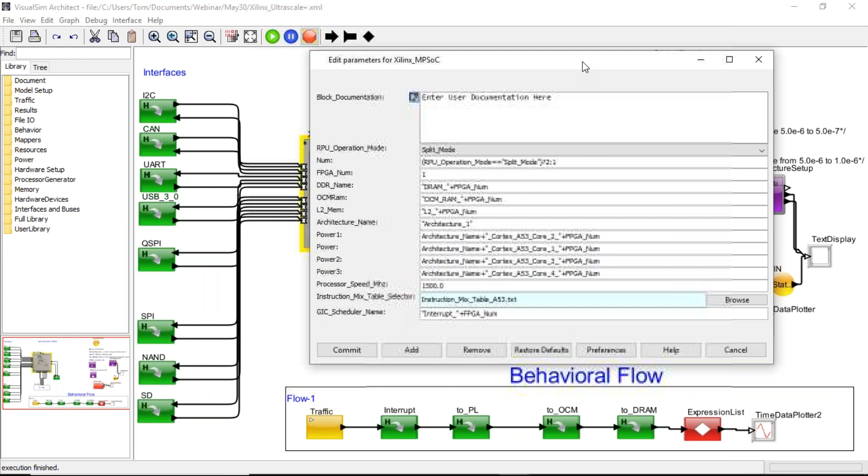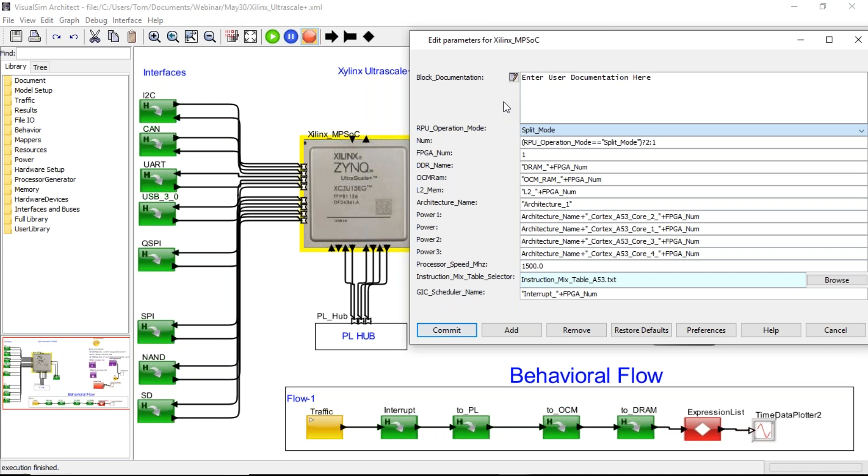For easy understanding, let me double click here so you can see the parameters which have been designed. As you can see, we have a real-time processing unit, and the RPU has two types of operation, the split mode and the lockstep mode. The split mode is the default mode, and can also be called performance mode. What happens here is each core operates independently.

If we go inside the MPSoC we have designed over here, we can see the detailed implementation of this Xilinx model. We have an application processing unit over here, the real-time processing unit over here, then the CCI unit, and then the Snoop control unit. We designed all of this to match the specifications given in the data sheet and linked them with each other so that at the end we get a perfect running model.

Now at the bottom we have a behavior flow which states what data has to be sent to the PL and what has to be sent to the processor cores. Accordingly, we are going to get a result. We are generating the statistics. For example, we are generating the power here and the latency over here. So I am going to run it and show you the results.

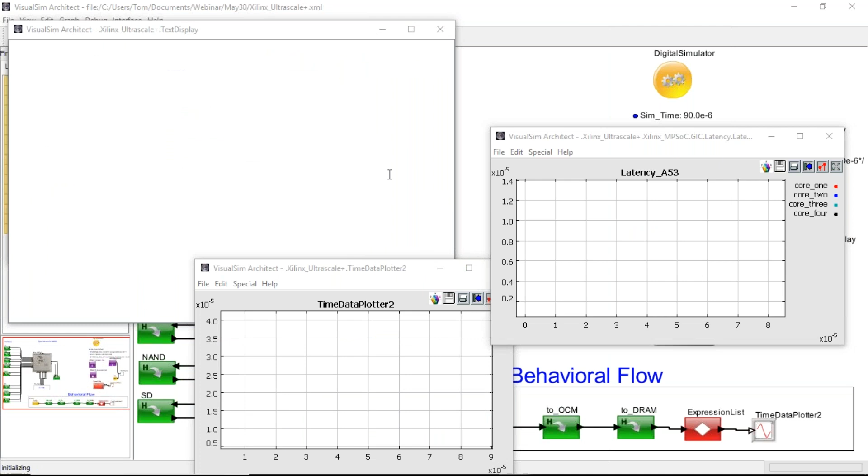So this window over here is plotting the power. As you can see, it is plotting the average and instantaneous power. And this one over here is the behavioral flow latency, which means the latency for the whole process to complete. That means the traffic is generated, then it interrupts the APU units, then it goes to the PL, then to the on-chip memory, and then to the DRAM unit.

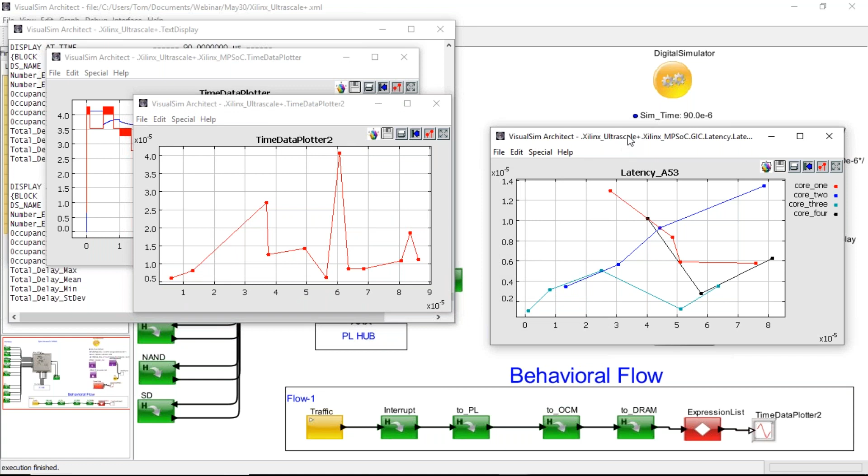For this whole process to complete, the latency has been calculated, and this is the plot which has been obtained. And this over here is the latency for the A53 cores which have been designed in the application processing unit, which is inside this APU, which is inside this unit.

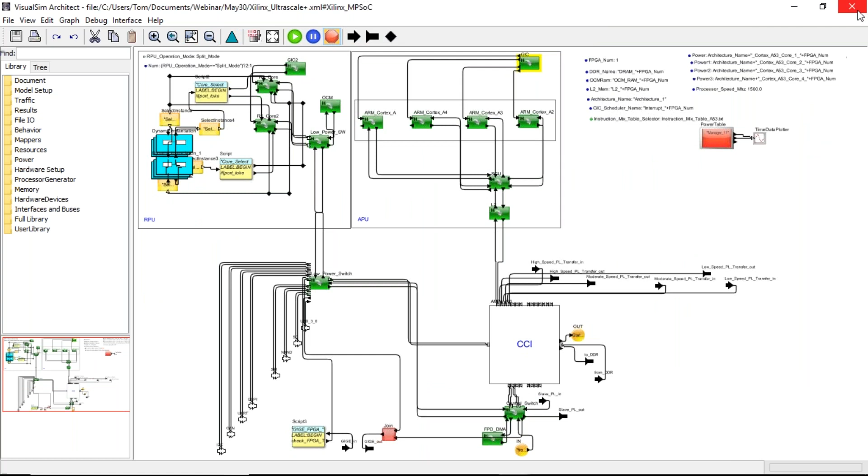So as you can see here, each time an interrupt is being generated, triggered, it is going to come to the GIC and it is going to trigger a specific core as per the application, and then it is going to look up to the cache unit, and then if it is a cache miss on L2, it is going to go through the CCI and to the external memory, which is the DDR.

So we are going to go back to the presentation. Yeah.

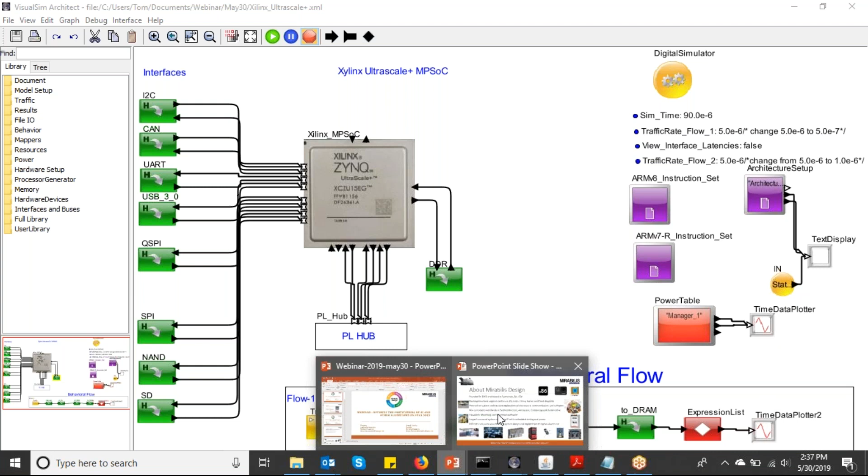So once we have the FPGA model designed, what we have to come up with is the metrics that we have to evaluate. So in the case which I have shown you before, it had a few of the design cases, for which we were focused on the latency and the power. So in this case, what we were focused on was latency and power. Similarly, if the customer wants to focus on throughput, then we have to come up with the cases where the throughput will be generated.

So now the next consideration of this webinar is to optimize the applications which are run on FPGAs. Optimization in the sense the user might want a case where the latency has been optimized or the power has been optimized, or a case where it can run thousands of test cases in parallel and still come up with a quite reasonable response time. And all those are the cases that we are going to be dealing with.

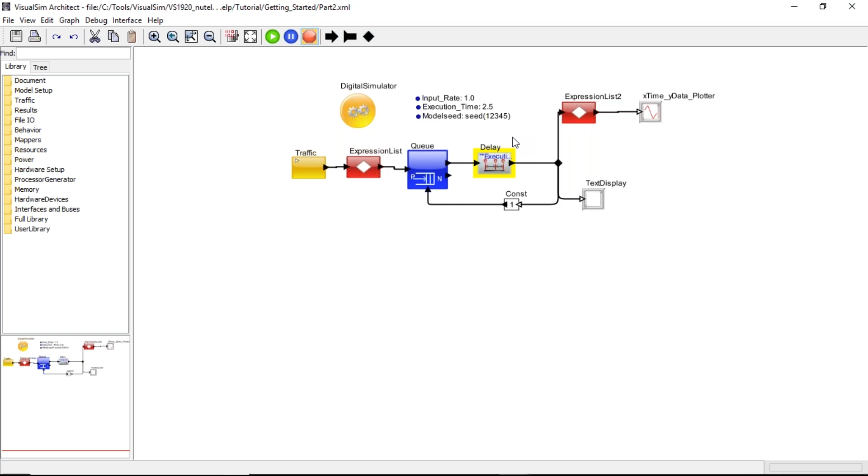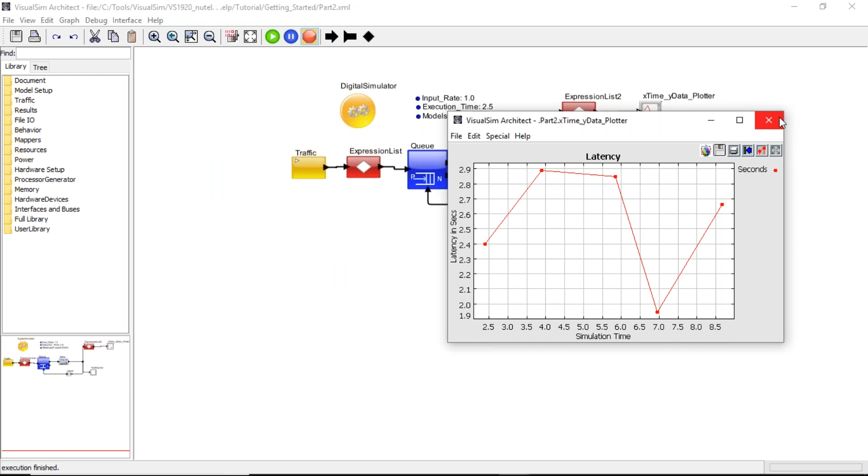There are different stages of modeling. At first, we'll design a stochastic model, which will have delay blocks. Then at a later stage, we'll replace those delay blocks with cycle-accurate models. Right now, this is a pretty generic, simple model. If you run this model, you can see the results generated. We have a latency plot and a statistics plot as well. Now let's say you want to run this model over tens or thousands of cases and compare the results on a single screen. That can be done with the help of the application known as the post processor.

So over here we run the same model for three different cases. For the first case, the execution time was 2.5 and the input rate was 1.0. For the second case, the execution time was 2.0 and the input rate was 0.8. And for the third case, it was 2.5 and the input rate was 0.5.

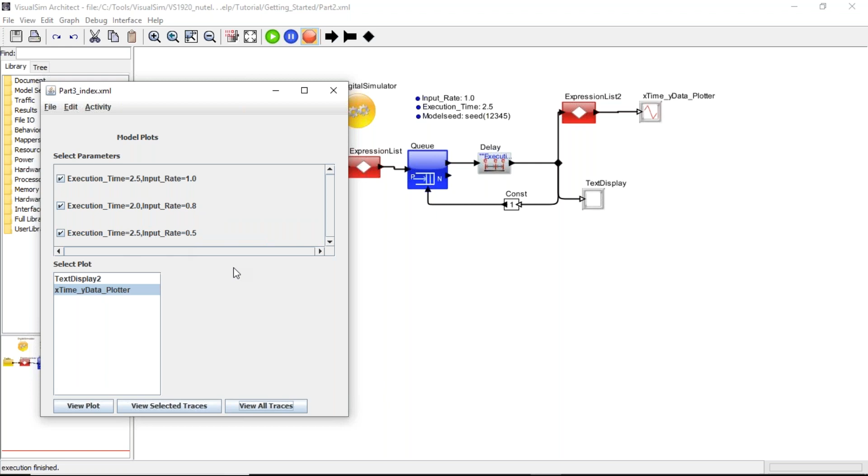So if I click on view all traces, you can see here the latency obtained for the three cases has been overlapped onto each other and can be viewed on a single screen. So this is one of the advantages of using Visual Sim, where you are getting a lot of applications on a single platform.

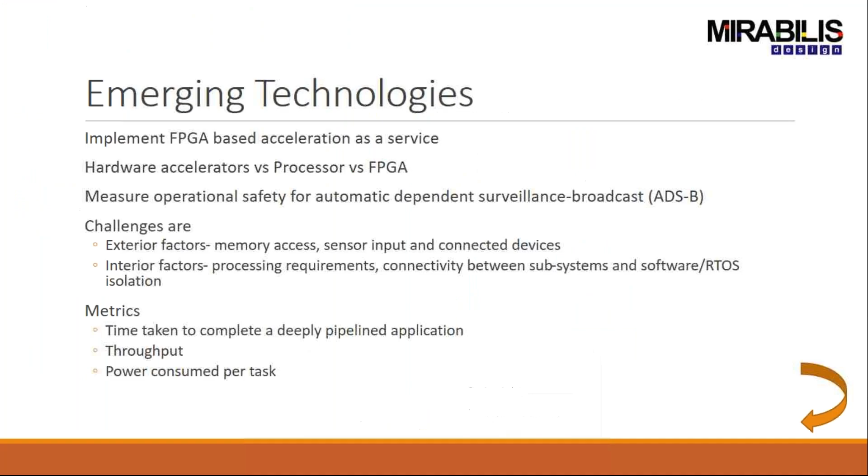So what importance does it have? Let's say we have an application where the buffer size is of utmost importance because the buffer size can be costly. So keeping the buffer size to a minimum is what the user might prefer. That is one of the concerns. And then the utilization. If you have a resource like a memory, and the utilization is quite low, then we don't need that much memory, so the memory section can be cut down quite well.

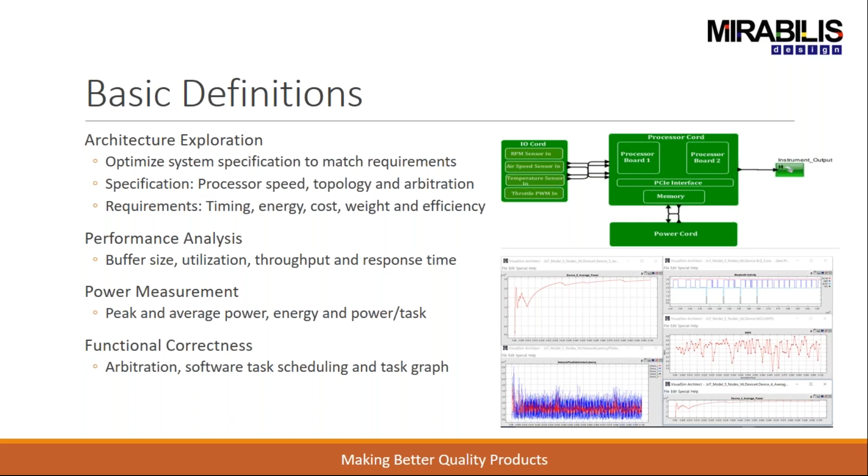And the functional correctness. In functional correctness, we will be checking the arbitration, software task scheduling, and the task graph. About Visual Sim: we are using Visual Sim for system architecture exploration. System architecture exploration can be done on three domains: hardware, software, and network. Over these three domains, we can do the analysis on four different sections: performance analysis, power exploration, failure analysis, and functional analysis.

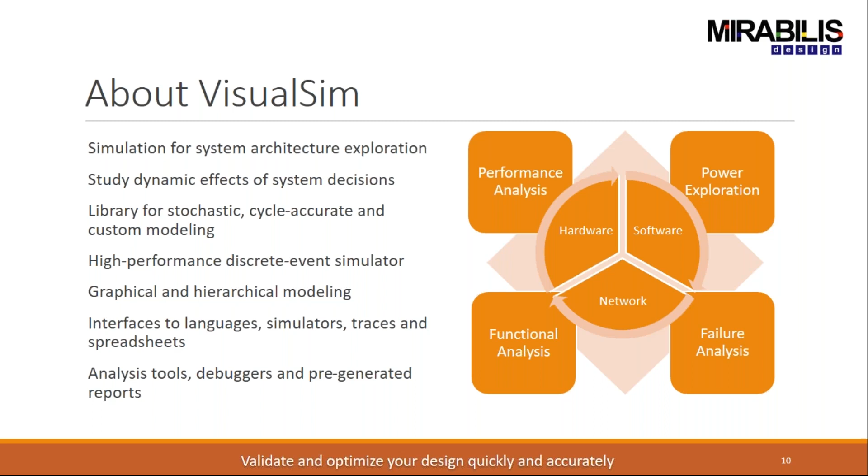In performance analysis, we will be dealing with the buffer occupancy, the latency, the throughput. In power exploration, we'll be dealing with the maximum power utilized, the average power used, and things like that. In failure analysis, we'll be dealing with what is going to happen to the model if some of the links fail, or if some of the cores are not performing as they are supposed to. And then we are going to do the functional analysis as well.

So the benefit of this library block is that when the user, let's say the user is having an application or a model which is using AUTOSAR or an ARM A53 processor. So all of those have been implemented and integrated into the library. So all the user has to do is go to the model. I mean, I can just show you.

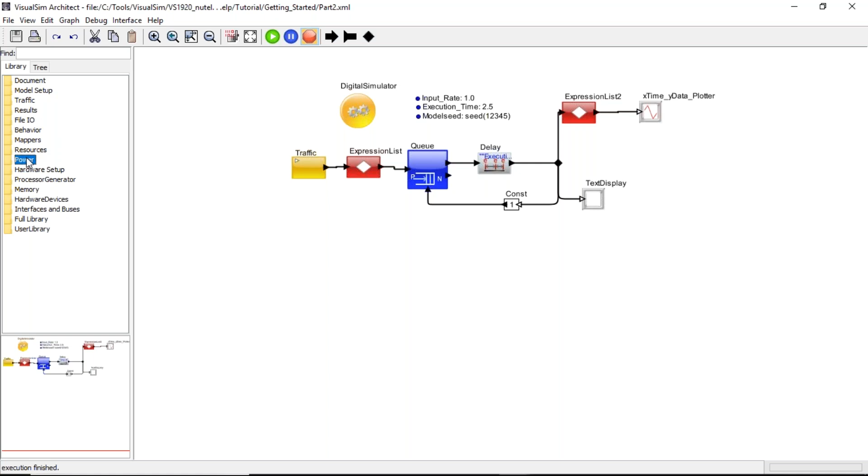You can see here on the left hand side, these are the library blocks. If you want to calculate the power, you can just go over here and drag and drop a power unit and then configure the fields over here such that it is going to match the requirement and the fields which have been designed.

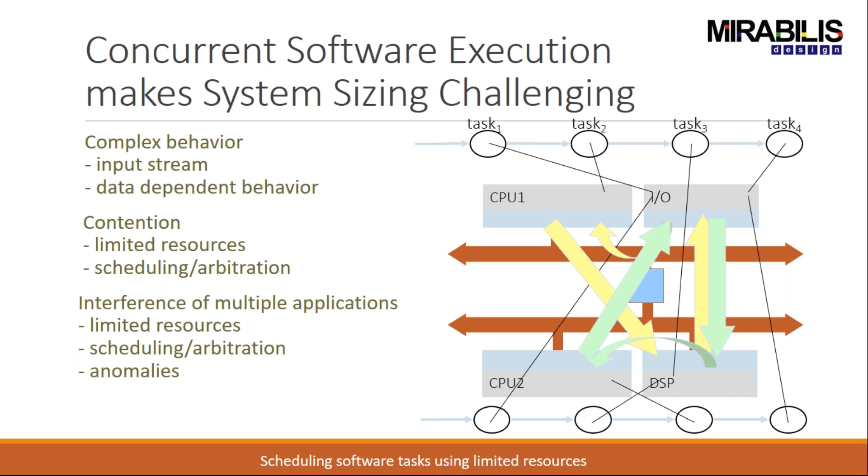So now there is no contention of resources. The data is going to go from the I/O through CPU one. From CPU one, it is going to go through the DSP, and then it is going to come back to the I/O. So now let's throw in another application. Now there is a contention. So this contention, limited resources, scheduling and arbitration have to be taken care of in case we are designing an accurate model.

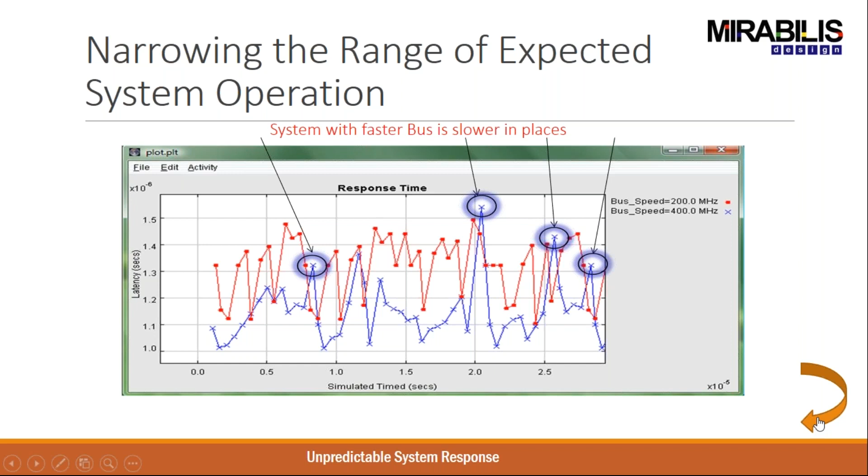So another design challenge is the impact of software architecture. Let's take an example of an automotive system. Let's consider the brake system. As you know, the brake unit is extremely time sensitive. What that means is, let's say a car is moving at 60 miles per hour. It is going to have about 3.5 milliseconds before the car has to come to a stop.

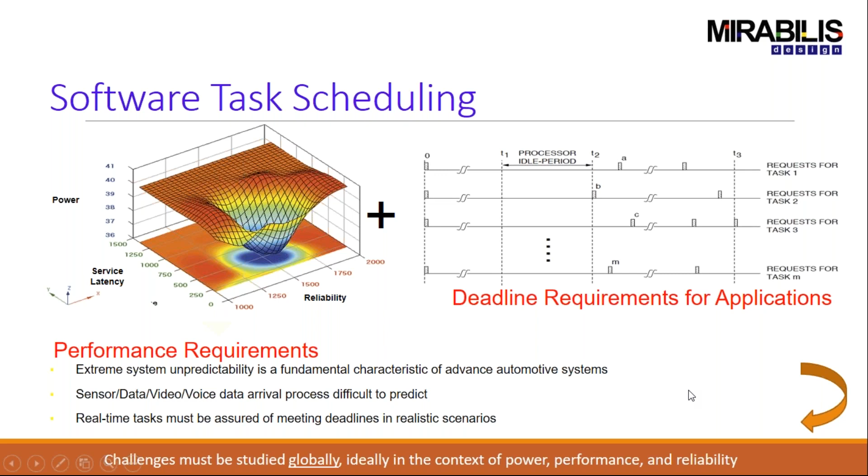So if you are designing an automotive system, it is extremely important that certain tasks are completed within a deadline. Such is the case with braking applications. So all those features have to be considered while designing a model.

So now designing FPGA models using VisualSim is going to have two parts. The first is deciding the best partitioning of an application onto the FPGA core and fabric, where the FPGA core houses the APU and RPU units, and the second is the fabric unit. The second part will be the internal operations of the FPGA, where we deal with how we can design an application processing unit, a real-time processing unit, snoop control unit, cache coherent interconnect, and general purpose DMAs.

And the considerations which have to be taken care of while designing these two parts: obtaining accurate timing details. So what does that mean? Obtaining accurate timing details in the sense we have to execute the pipeline applications in a timely basis.

So if you are implementing a DNN or ML application, then it is of utmost importance that the pipeline, the nonlinear applications, the ReLU or the matrix multiplication, has to be done in a sequential manner. Then the latency calculations and the scheduling and the partitioning of the applications also have to be given utmost importance.

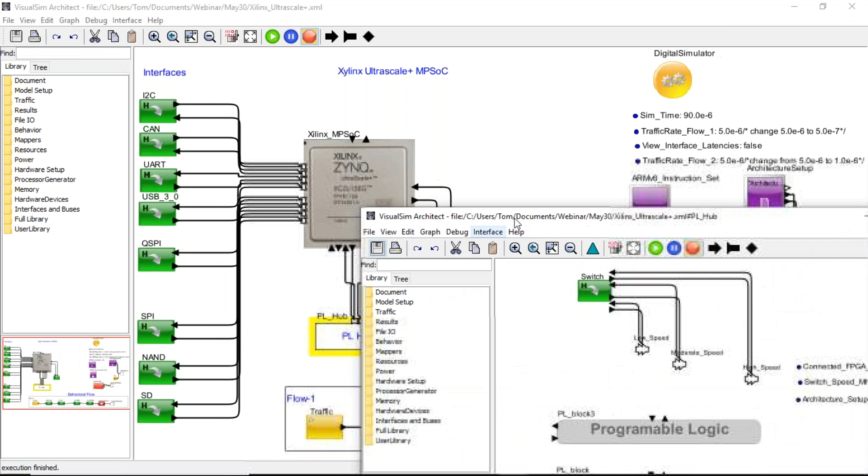So what we have over here is a bunch of interfaces like I2C, CAN, UART, USB 3.0, Ethernet, all of that. And then we are feeding that into the MPSoC. And here we have the PL hub, where if I go in, you can see the programmable logic section. Two of them I have provided, and if I double click on that, I can see the parameters which can be changed as per the user's wishes.

So this whole model shows the importance of using a virtual prototype. As a user, you can just build up this virtual prototype within a couple of weeks, and then you can run the model on different test cases. As you can see, if I put this parameter to write, then that section is going to run in sequence with the write sequence.

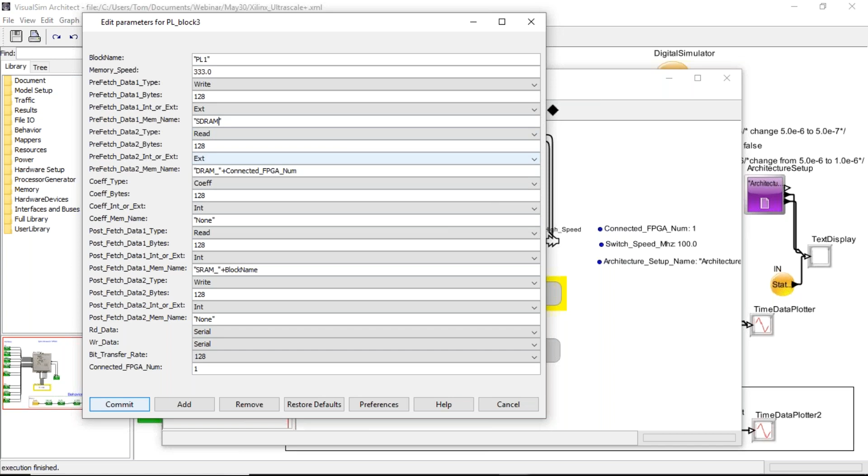So if I am putting it as external, that means we have to prefetch the data from an external source, which can be given as SDRAM. So what happens now is it is going to do a write sequence to an external memory SDRAM. So it is that easy when we are doing system level modeling. That is one of the key benefits of using system level modeling. So back to the presentation.

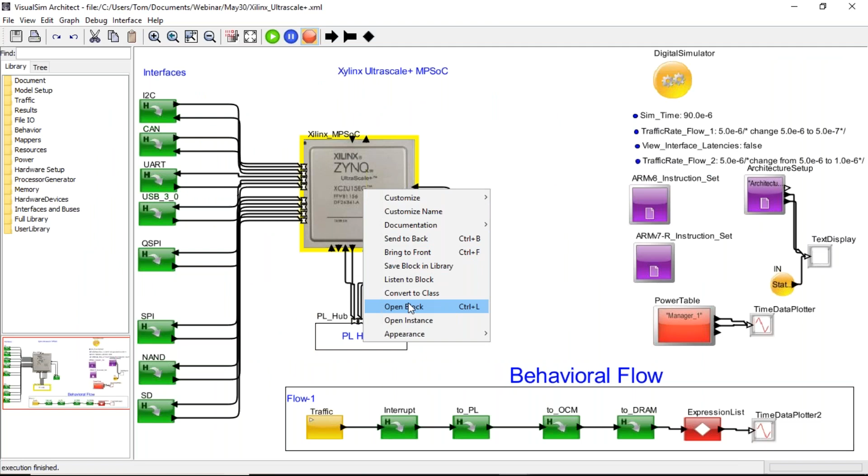So now we need to design the FPGA core and a fabric. We begin by designing a stochastic model as per the design flow, using delay blocks instead of the actual ARM processors in the FPGA cores. This is an extremely accurate model. What I mean by accurate is, if I go inside, we can see the processor blocks, which have the pipeline stages, the 7 stage pipeline, and the I1 D1 cache units, the sizes, the miss memory, and this has been designed to pretty accurate stages.

But when we are starting to build up a virtual prototype, what really matters is to bring up an easy or stochastic model which has just the delay blocks. Once we have the delay block stochastic model, we obtain the statistics using it, for example, the latency, throughput, utilization stats, and the power usage. Once we have the stochastic model up and running, we are going to replace those delay blocks with the ARM processors and the cycle-accurate memory blocks, GPDMAs, and so on.

And once we implement the cycle accurate model, we are gonna calculate the desired metric values using this cycle accurate model. And once we have both the cycle accurate and the stochastic model, we are gonna vary the different parameters, partitioning, sizing, and see how those results change.

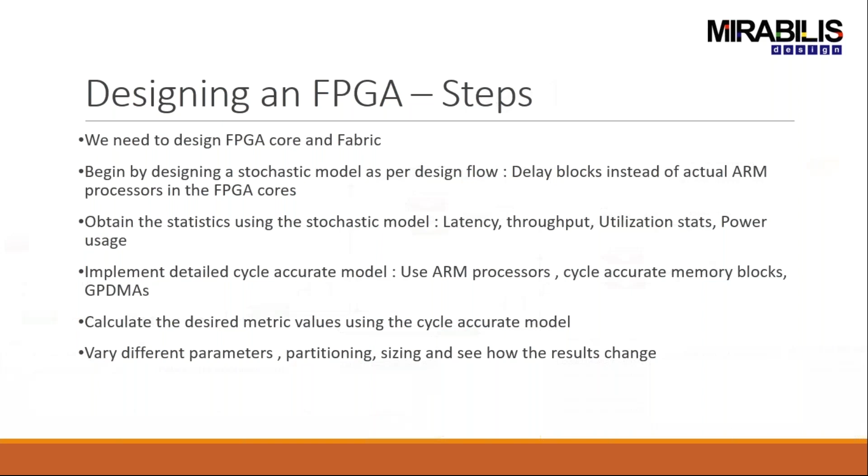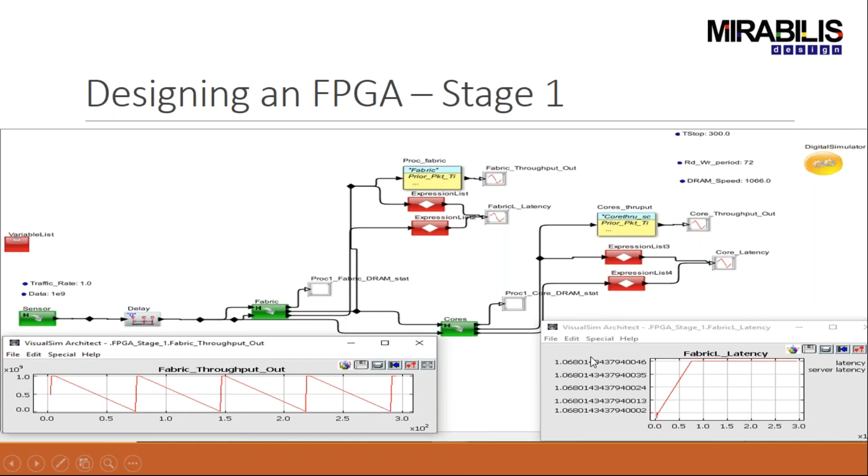So over here, we are having one of the earlier stages that we built in the building of an FPGA application. So over here we are having a sensor which is gonna go through a delay block and then go to the fabric and then to the cores. And we are calculating the latency and the throughput for this early stage stochastic model. So I am going to take you to that model right away.

Yeah. So we are having this model over here. So if I am gonna go to the sensor block over here, sensor is nothing but a traffic generator. So it is going to generate a traffic at a rate of traffic rate, and it will be fixed. So that means we are going to generate a traffic at each 1 second, and it will be coming out through this port and then going to the fabric and the FPGA cores.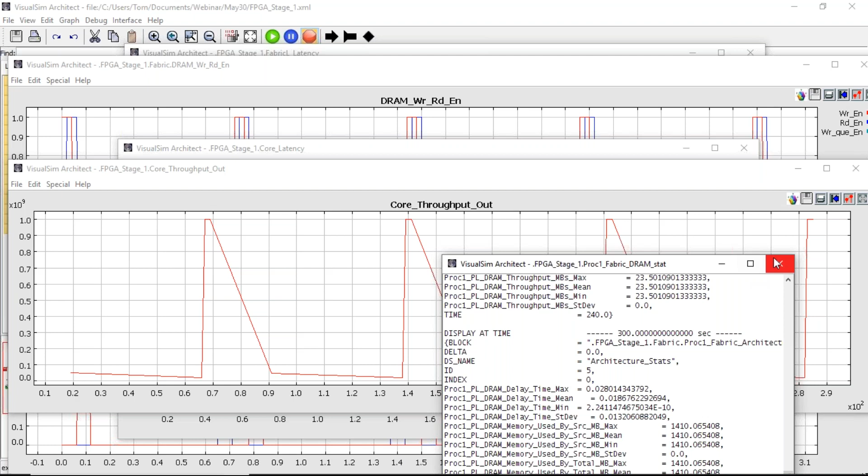So let me just run this model so that you can see how, yeah, we are having the fabric throughput, and it is having a peak of 1 gigabytes per second, and then we are having a couple of statistics, proc1, DRAM, delay time, and then the throughput, how much we are having, and then what is the maximum and the mean time, and all those have been calculated over here.

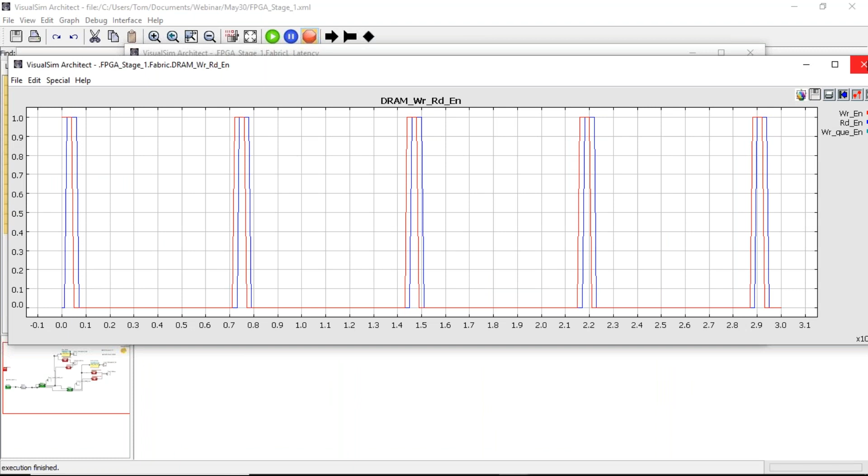And then the core latency, it's also been calculated. And then the DRAM read write read enable timing, and then DRAM write read enable timing, and then fabric latency, all those have been calculated over here.

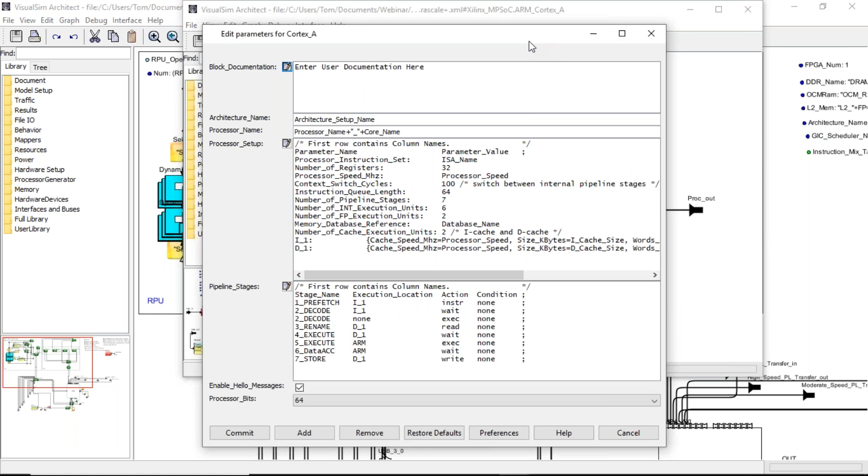So if I'm going to go inside this core, as you can see, we are just having the server block. A server block is nothing but a delay block, which can provide variable delay. So this is our core. Now in this model we have only used a server block. So as you can see, if we compare this model to the model that we have built over here, you can see the clear difference between stochastic and a cycle accurate model. Over here we are using the real processor blocks, and over there we are just using a delay block to get the first design flow up and running.

So we implement this design within a week's time, so that we are having a basic design flow running. So once we have this design flow running within a week, we then start to replace the delay blocks with the cycle accurate models. So that is what happens over here. We are going to go to the stage 3 over here. This is what we end up with after implementing those cycle accurate features.

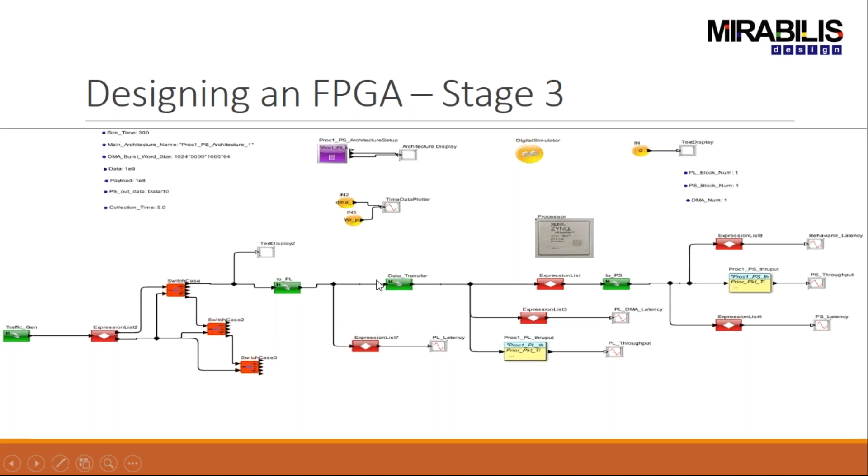So over here we can see the earlier server block has been replaced with a much more detailed traffic generator block, and then we are having a bunch of switches to select to which fabric it is being transferred to, and I'm going to take you to the model so that you can see it pretty easily. So over here, if I'm going to go inside, we can see we are having much more detailed traffic generators put over here.

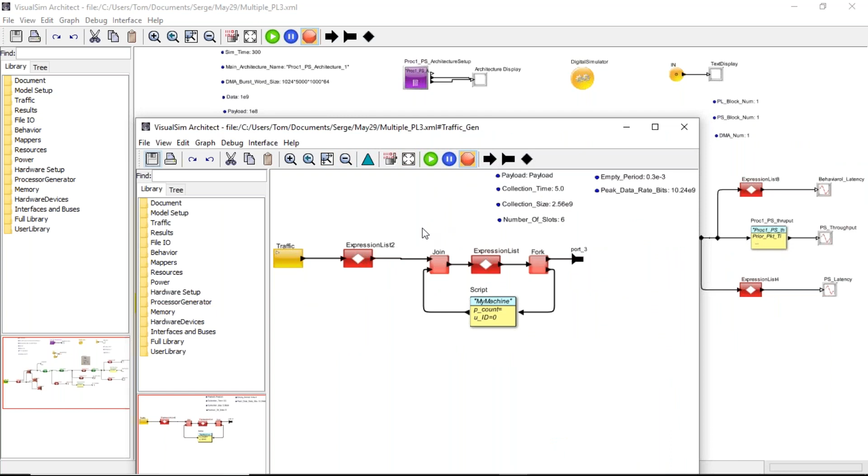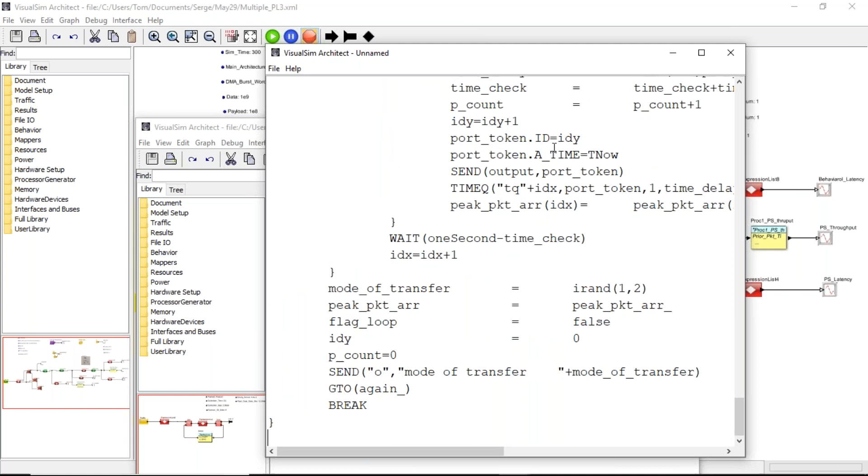So this is what we call a script, which can be used for implementing our logic, whatever arbitration or whatever logic that we want to use. So over here we have designed a traffic generator which will be totally random, but at the same time it is going to maintain a specific data rate. So if I'm going to run this model, we can see.

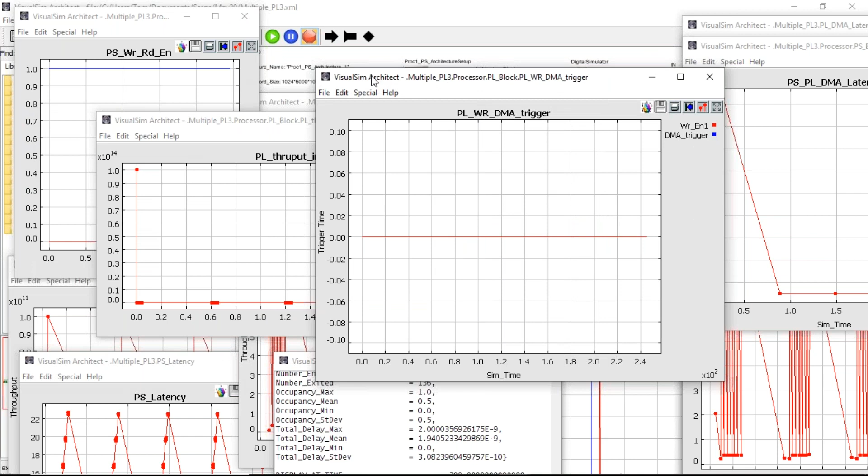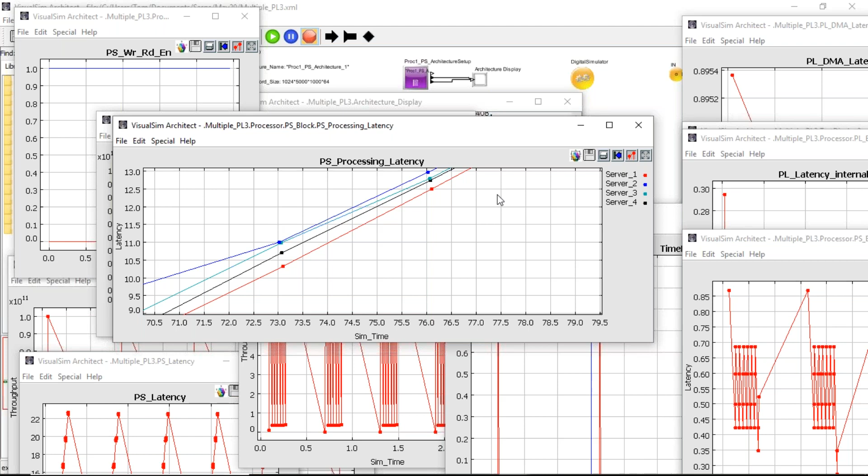So as you can see, these are the calculations which can be done using a virtual prototype. The amount of calculations made using this prototype is huge, like the PS, PL, DMA latency, then the throughput, then the statistics, like the number of packets entered, number of packets exited, are there any packets dropped, all those can be obtained. And then over here we are having the PS processing latency, which means over here you can see the latency of each of the server cores, and then over here we are having the DMA latency as well.

So now, yeah. So why do we exactly need the system level simulation?

So as you have just seen now, we can implement our design. Let's say we are having a certain application, and first we used Xilinx UltraScale Plus, and then we used the same application on Intel Altera or Intel Stratix, and then we used the same application to be run on Microsemi. And at the end of that, we are having three different virtual prototypes which run on three different vendors.

So now, if you compare the results, such as the latency, throughput, or maximum utilization, we can find which one of them actually performed better for your application. Another reason why we are going for system level simulation is for selecting the right hardware for an application.

So as I said before, the performance gap between a GPU and an FPGA for a DNN application has become pretty slim. So how does a user decide to go for a GPU or an FPGA before even fabricating it? That's where system level simulation comes into the picture. Over here, you can just design a virtual prototype, run the application using a GPU, and run the same application using an FPGA, compare both of the results, and you can easily make the choice then.

So another reason why we are using system level simulation is to prevent any surprises that may arise after the implementation. And another test case is that we can drive our virtual prototype to cases where it might actually fail. So for example, I'm gonna show you this model again. As you saw over here, we are running this model for a split mode. So what is going to happen if I run it for a lockstep mode?

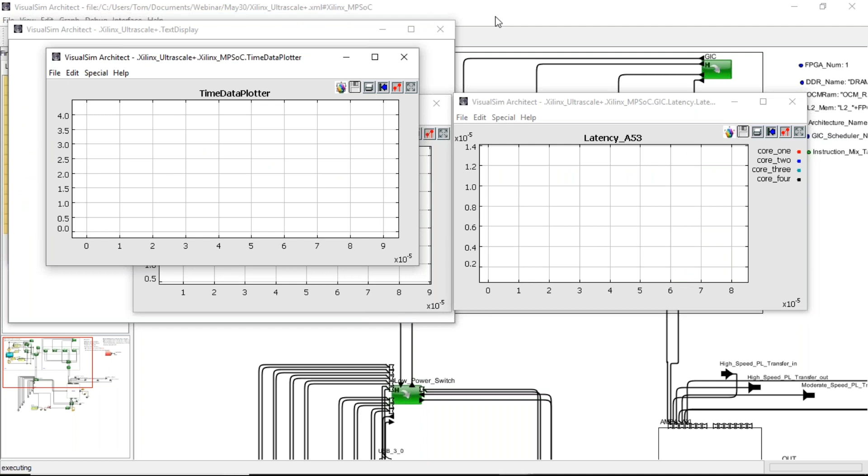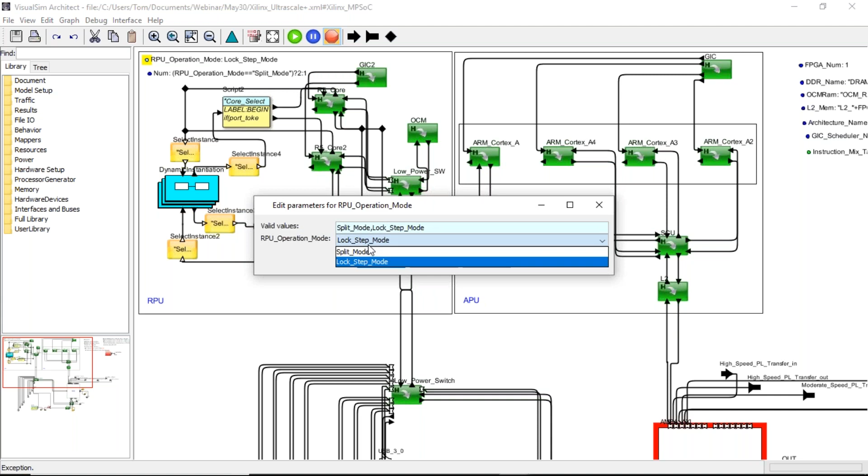So I am going to run this model. Yeah, as you can see here, earlier the number of cores which was supposed to run was 2, and we changed the mode from split mode to lockstep mode. In split mode, we actually needed independent processing modes. So that's why, as you can see here, it dynamically got allocated. And these are a few of the cases where we can use system level simulation.

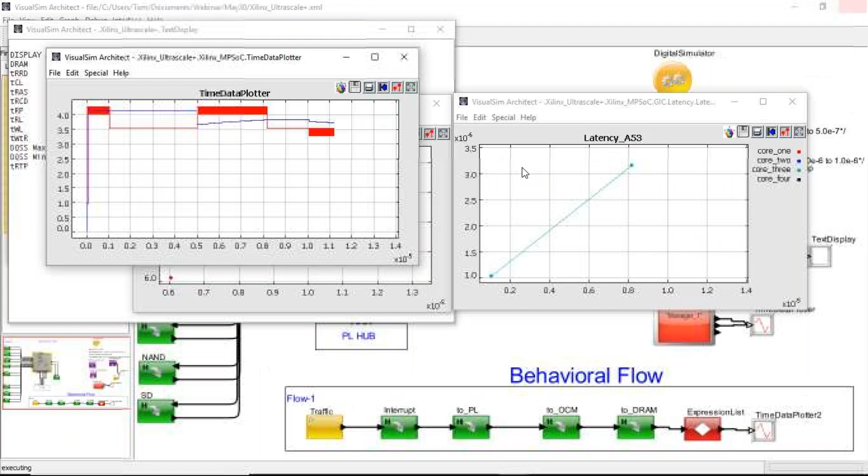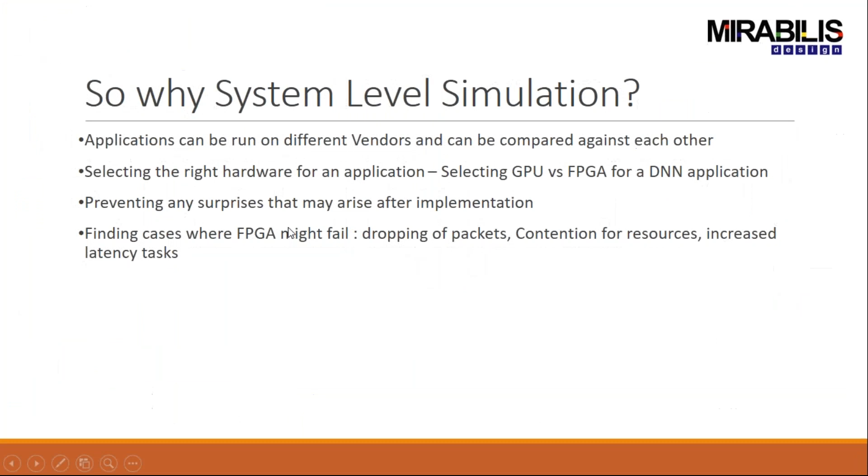Yeah. So in this case, we updated the model during the run. So now I am gonna show you a case where FPGA to FPGA data transfer takes place. What that means is, in high performance computing systems, each computing node communicates via a high speed serial bus to ensure sufficient data transfer between them. However, computing nodes with different bus protocols find it difficult to communicate directly. So in such cases, FPGA comes in very handy. In this case, we are sending the data from one FPGA to another using the Ethernet port.

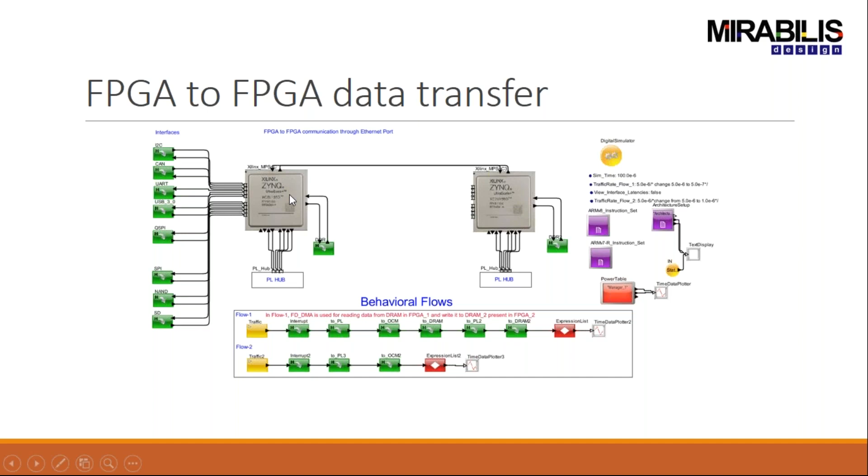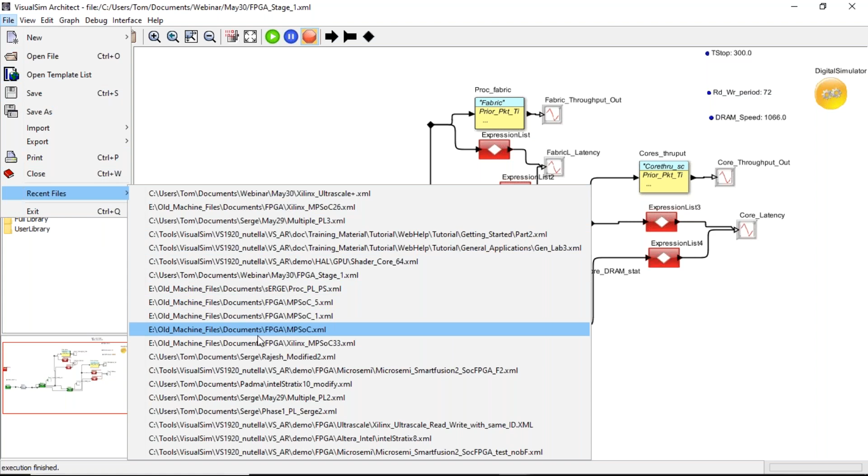So let me just take you to the model. Also, before that, let me take you to the model which I was showing you earlier. And I'm gonna open a new one, yeah, this one right away. This won't take that long. This is gonna show you the importance of why we are using system level simulation.

So now we are having over here this model, which says FPGA to FPGA communication through Ethernet port. So I'm gonna run this model and show you a couple of results which are gonna pop up.

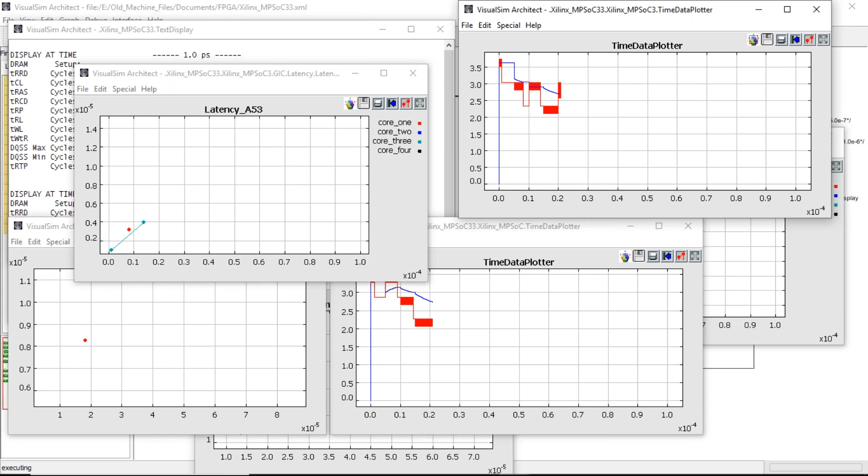As you can see here, it's taking quite a bit of time, but the latencies are getting plotted. So I am gonna let it run in the background and show you the functionalities that have been implemented over here. The PL hub over here has three different ports, which correspond to high speed, moderate, and low speed transfer.

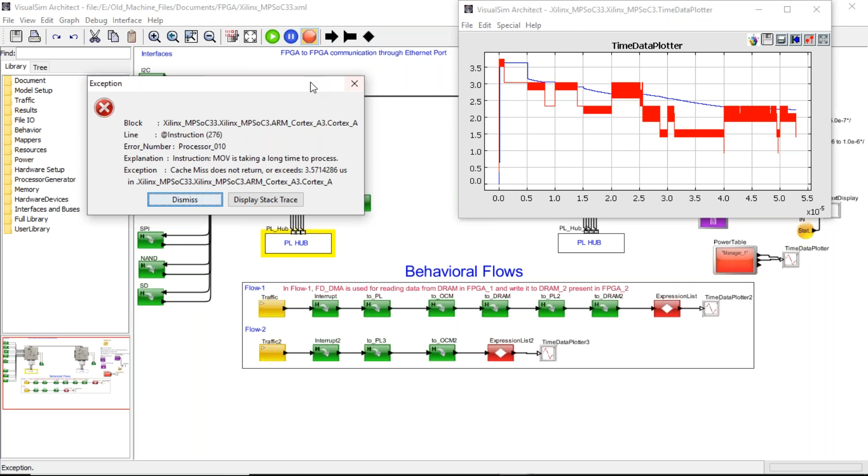So now, as you can see here, this one says that a cache miss happens. With the help of this system level prototype which we have designed, it is actually showing us what changes we have to make and where we have to make them. As you can see, there is a red highlighting visible over here. So I'm going to go inside and see which one.

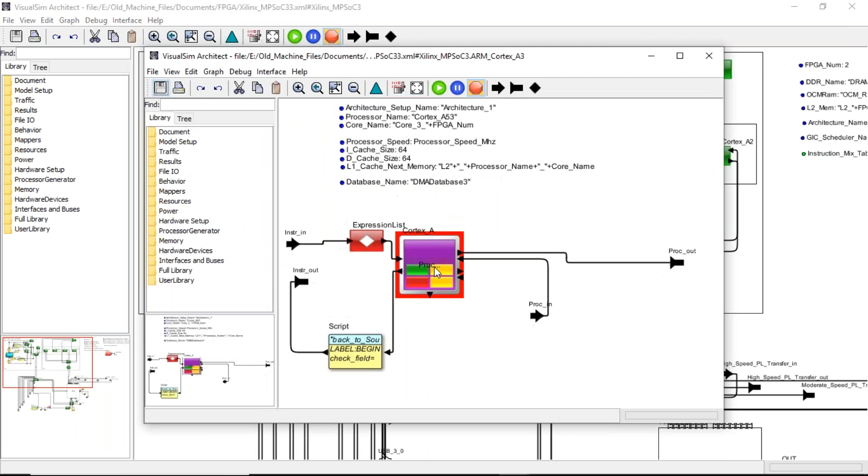Okay, so as you can see here, the ARM Cortex A3, core 3, is actually having an error. This processor core came up with a cache miss during the simulation for the current definition of parameter values. As you can see, we have defined the parameter values to be so and so. So this is one of the benefits of using system level simulation, because we can actually see when a cache miss happens, or where the latency goes up high, or where the power performance is undesirable, and make corresponding changes to the model as well.

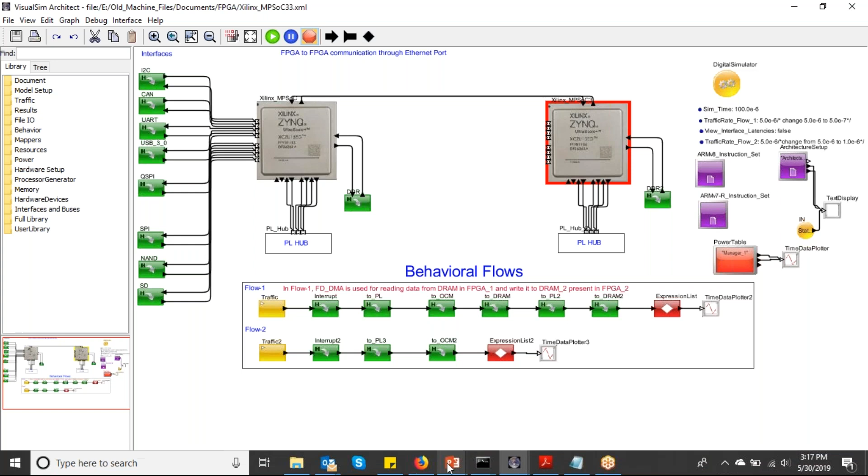So now we are going to go to the FPGA, the Intel FPGA. Over the right hand side, we have the prototype which we have built, and over at the left hand side, we have the block diagram which has been obtained from the datasheet. I am going to take you to the model. I'm going to show you what exactly has been built over here.

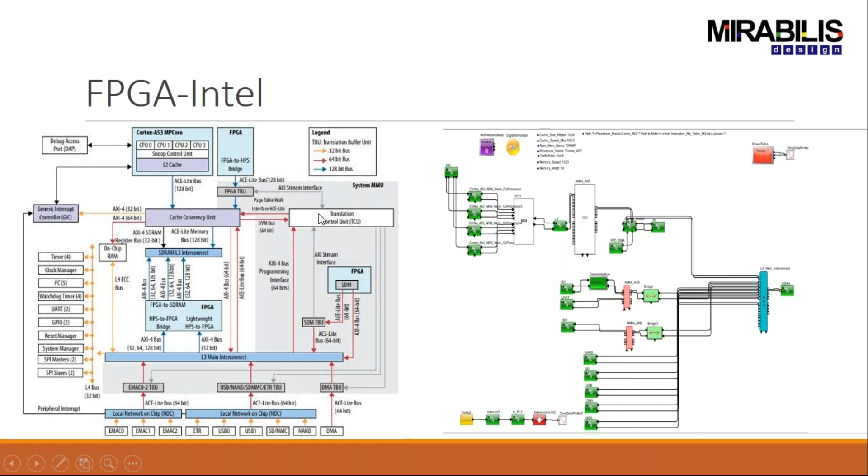So we have a generic interrupt controller over here, and then the A53 cores over here, and then the cache coherency units over here, and then we have the L3 interconnect, and then we have the interfaces connected to it. So we have the FPGA from three vendors. This one over here is Intel, and this one is the Microsemi.

So for the Microsemi, as you can see, the interfaces are connected over there, and we have a behavioral flow at the bottom, which is mapping to each of the processor cores, and then we have the AHB interconnect bus and the switch cases, the DMA for the data transfer, and so on. So we have the Xilinx, the Intel, and the Microsemi, which are prototypes ready to go. And if any of you want to take a closer look at it, you can just contact us, and we are going to send you the models.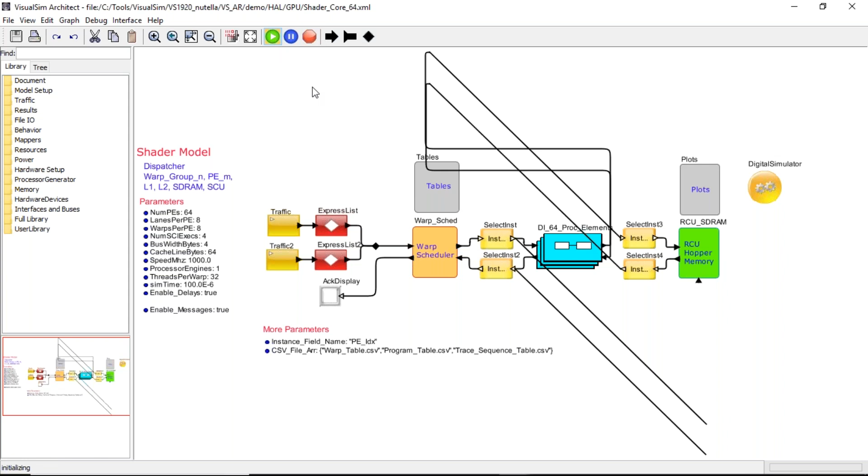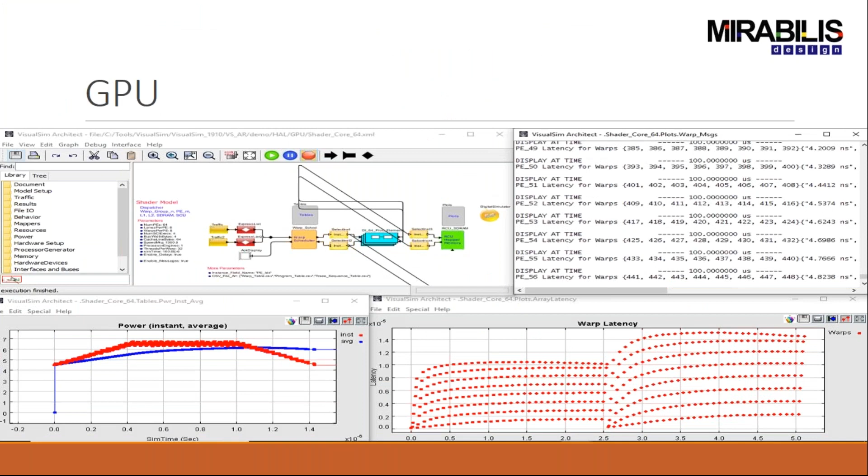As you can see, the latency plots are also being calculated over here. The warps being generated are being specified over here. So as a result, we get the latency stats over here, and we can see here a maximum of about 15 microseconds for this application, and a maximum of 7 watts of instantaneous power we consume for this application.

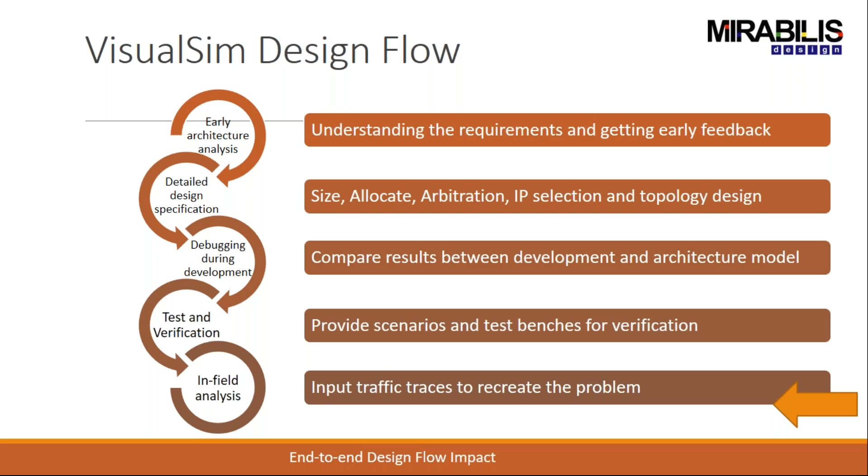So now we are going to go through the VisualSim design flow. What we need to do is understand the requirements and come up with the proper design. So what does it mean to understand the requirements? If you are designing an application where response time is critical, then we have to concentrate on getting the latency down. Or if you are designing an application where power consumption is critical, then we have to design the metrics so that the power consumption will be kept to a minimum. And then the size allocation, arbitration, and the comparison of results between the development and the architecture model, all those things come up in the design flow.